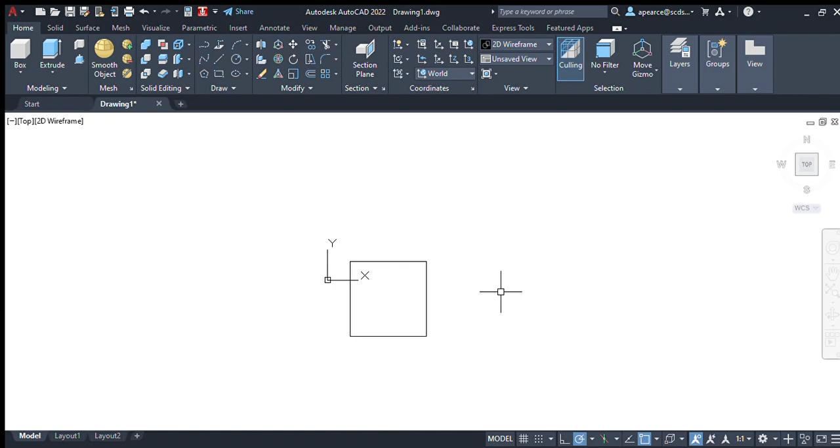And we're going to start by drawing the top view of the water bottle. So we're going to go to rectangle. When we choose the rectangle command, we're going to click a start point and type in D for dimensions: 59.5 by 59.5. You have to click the button, but it makes a square for us. I know we use the rectangle command, but a square is a rectangle. So there we go, it's all together.

Then what we're going to do is draw an arc using start and direction. We're going to start in the top corner, go to the other corner, and set our direction to about 8 degrees.

It's that time, 2 minutes. Let's get yourselves moving. We're going to move it from the very top. Pick it up, put that hop in your step, to the midpoint.

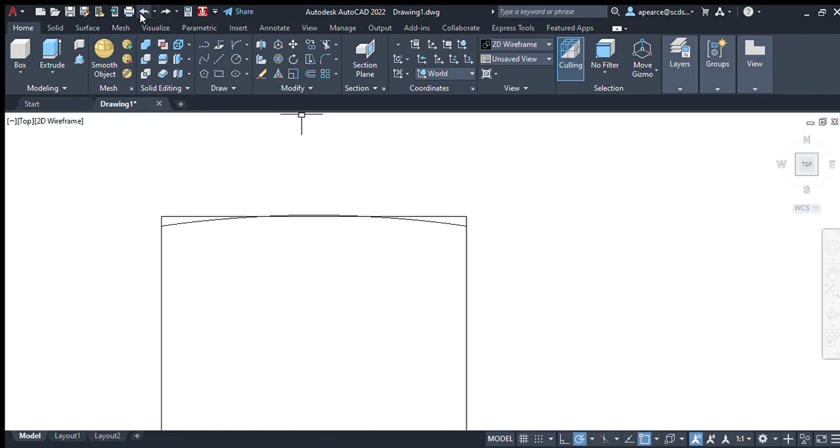Let's try that again. So when we move this one, we're going to go from the midpoint. I think midpoint mustn't be set here. There we go, that's why it didn't grab.

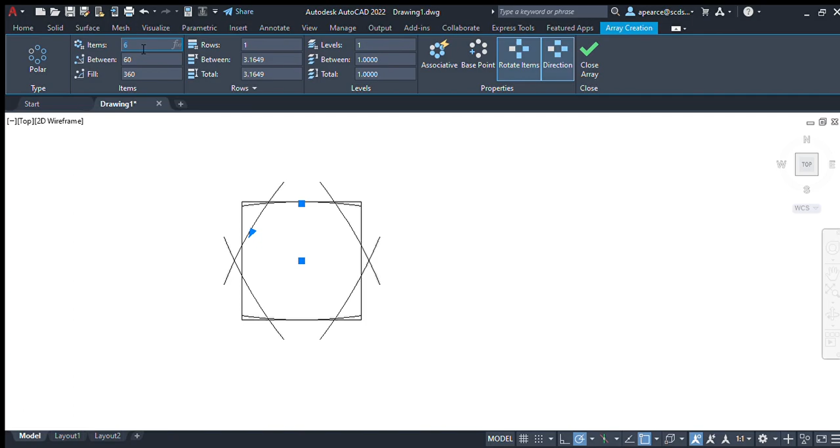To our midpoint. Once we have that in place, we're going to go to polar array. We're going to click the top arc we just made, then click the geometric center. When we do the geometric center, a couple things happen: first it adds 6 items, we want to switch it to 4, and we want to make sure associative is off, and then we're going to close it.

Now we can erase the original rectangle by clicking on it. And we need to join up the sides, so we're going to use the fillet command. When we click fillet, we're going to change the radius. I chose 6 — you can go larger or smaller, but it gives a nice little look to it. We end up filleting all 4 corners.

And then we want to make this one solid unit instead of a bunch of little lines or arcs. So we're going to go to the join command, the 2 arrowheads that touch. Join it all together and it becomes one solid shape.

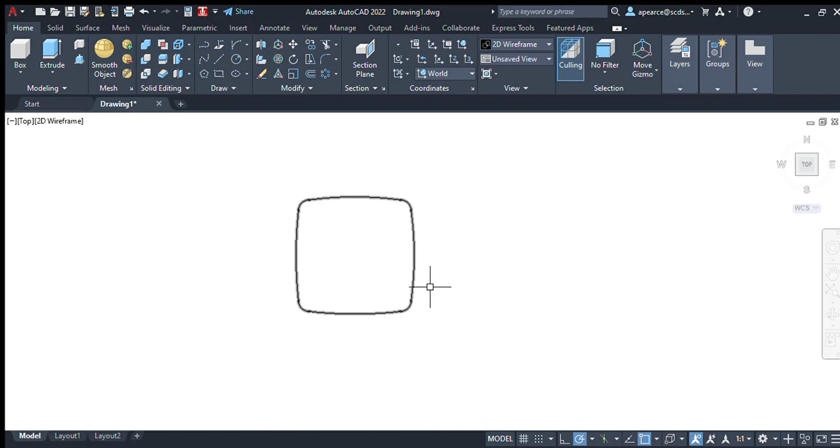So we're going to copy this to the side, and we need to scale this down. Now to scale it down, I used the single view drawing and measured the bottom size, and I divided it from the 59.5. So what I found is that I needed to scale the bottom.

So you select scale, click on it, go to the center point, and it's 0.795. So then it makes it a little bit smaller, and we are going to move it back into place.

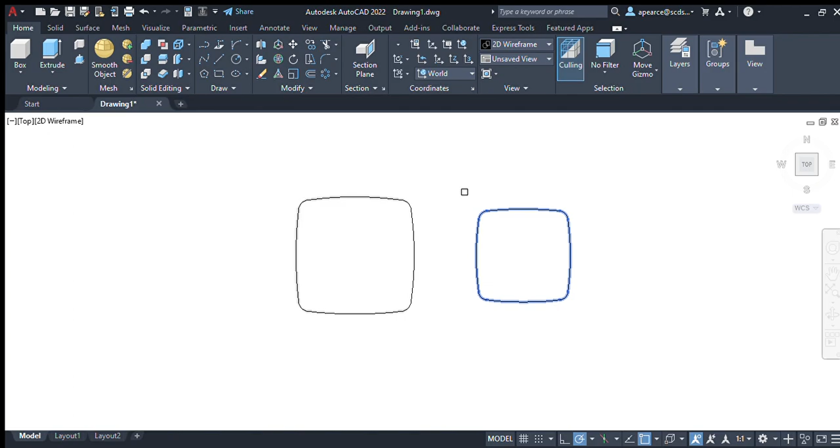The other one we're going to scale as well, so I'm going to copy it while we've got it here. Going to move it to the side, and then this one gets scaled.

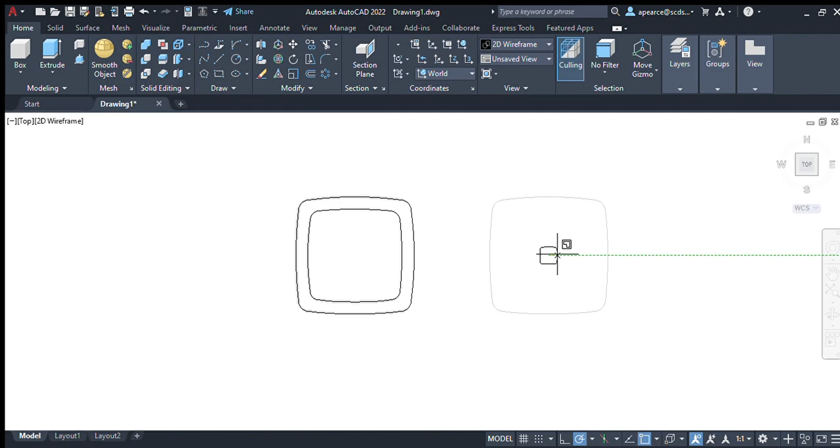The scale for this one is 0.941. We have all of our shapes for the bottom.

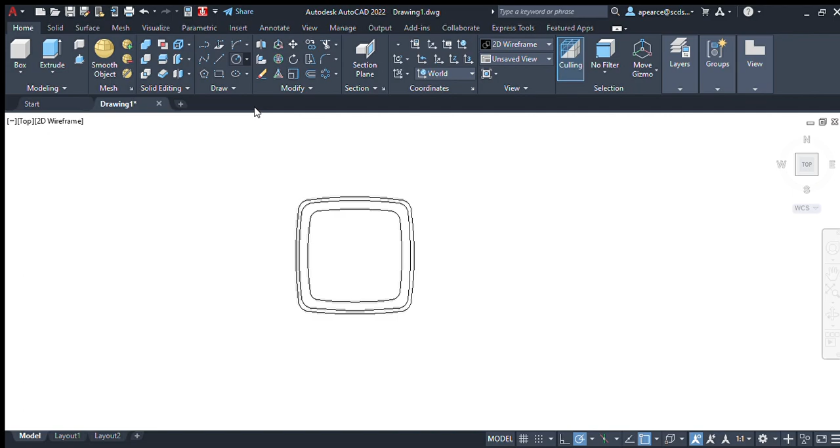We now need to just add the circles, but for circles they have to be diameter. So the first diameter is 24. The second diameter is 25.8.

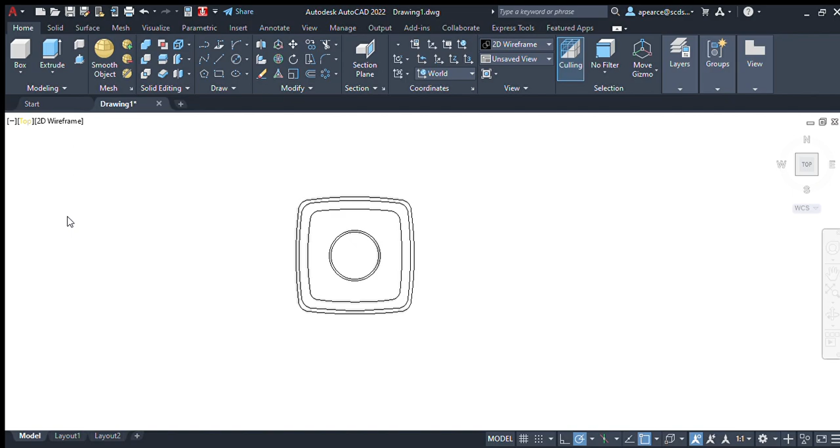So then we've got our shape here. We're going to switch this to Southwest isometric view, and now we're going to move some of our items.

So we're going to move the inner circle, and it's going to go straight up 216 units. The second circle gets moved up 186 units. Make sure that your polar coordinate is set to 90, and make sure when you drag it up it says Z.

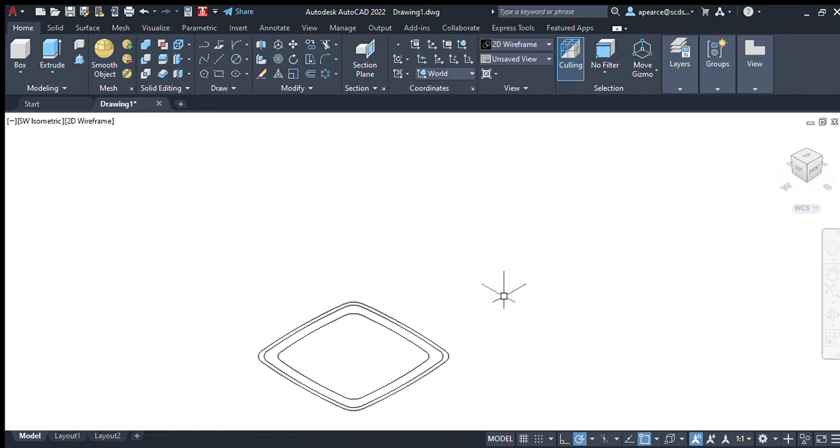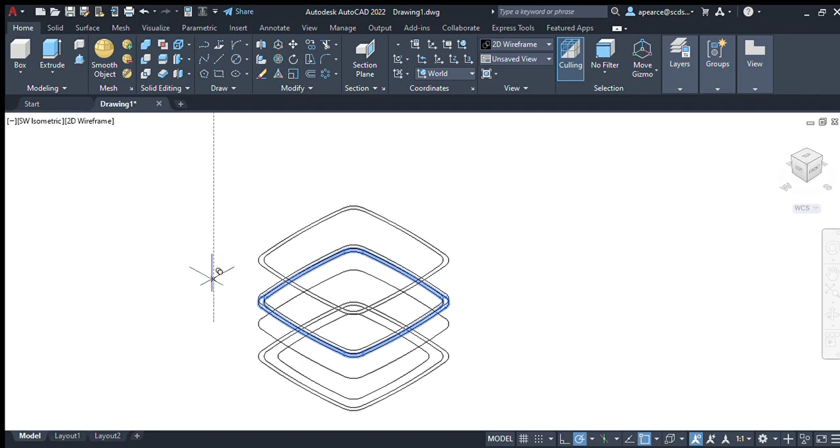The next copy we're going to do is take these, and the first one's going to come straight up 1.8, and the second one comes up 10.8. So it establishes basically our size, which allows us to get to a point where we can loft these commands together.